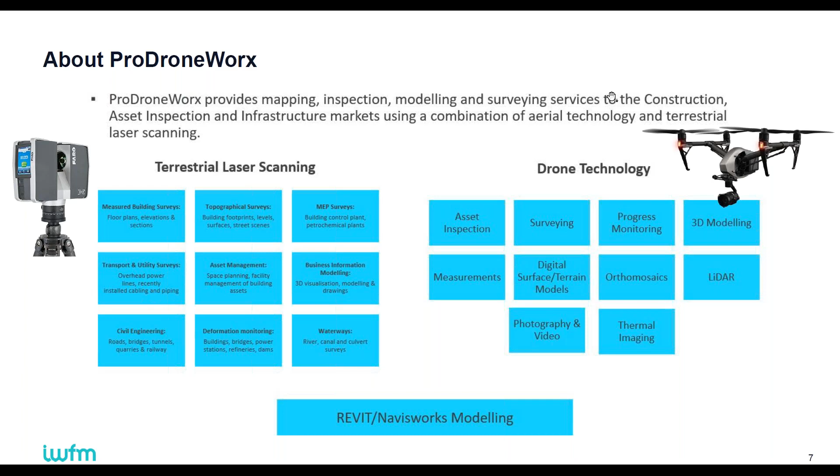So if you're looking at a particular piece of infrastructure, let's say a controller on a heating panel, you want to find out when was that last serviced, what's the model number of it, what's the operations manual. A lot of that information we can embed within the models that we create, thus saving clients a lot of time and money.

But yeah, these are some of the high-level benefits of using drone technology. I'll go through them quickly, touching on them as we go through the presentation. So the first one, cost savings. There's big cost savings when it comes to using drone services and solutions. They can be more economically beneficial than using traditional methods. It is cheaper to carry out a drone survey versus, say, a terrestrial laser scanning survey.

There's also big time saving elements. A drone survey can be done very, very quickly. For the vast majority of drone surveys, we can carry them out within a single day, whereas using traditional methods like terrestrial laser scanning, it could take a week, two weeks, etc.

A good example is we worked on a big project - a 20-acre site for a client, with a number of different buildings with different types of equipment on site. We carried out a terrestrial laser scanning survey of that site in 15 days, whereas we carried out the same survey using drone technology within a day. So there's massive time savings there. Again, there's pros and cons to using both, and we'll touch on that as we go through this.

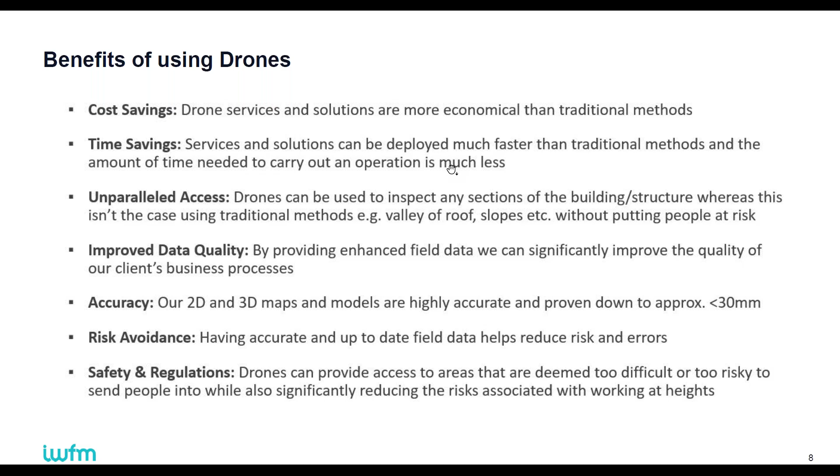This is an example of one of the digital outputs we produced, called a 2D Orthomosaic. For those unfamiliar with the term, essentially this example is from a project we flew in central Cardiff.

We had very limited access to the roof facility or roof area, and were only able to access this central verge here.

From that area, we were able to fly the drone and capture high resolution images of the roof area. An Orthomosaic is created from the hundreds and thousands of individual images we collect on the survey.

Those images are stitched together using photogrammetry software to create a 2D orthomosaic.

A 2D orthomosaic is ortho-rectified and georeferenced, which means it can be used in any AutoCAD, GIS, or BIM type system, and you can take measurements from it.

So if we wanted to take a measurement of the overall width or height of something, or calculate areas, lines, etc., all of that can be done from these 2D orthomosaics.

Because they're ortho-rectified and georeferenced, they're also a great way to do comparisons over time.

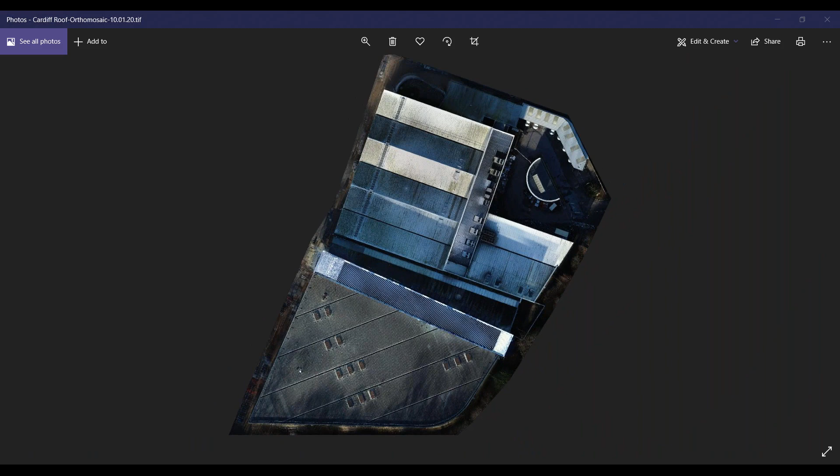You can also see here this slide - this is the DWG file from the roof survey we did, so you can see the DWG or CAD file overlaid on top of the Orthomosaic.

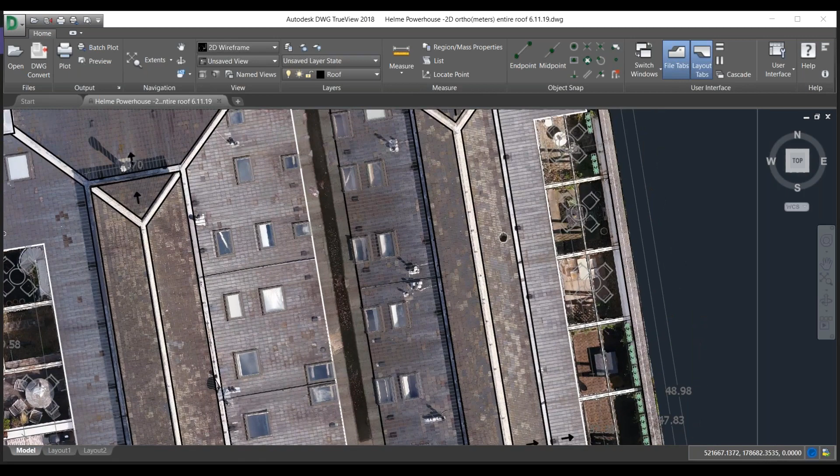You can see all the line work that's taken place, and it gives you all the different values.

So this can be used for planning and design work by an architect, and it could also be used for a planning application as well. It's very useful.

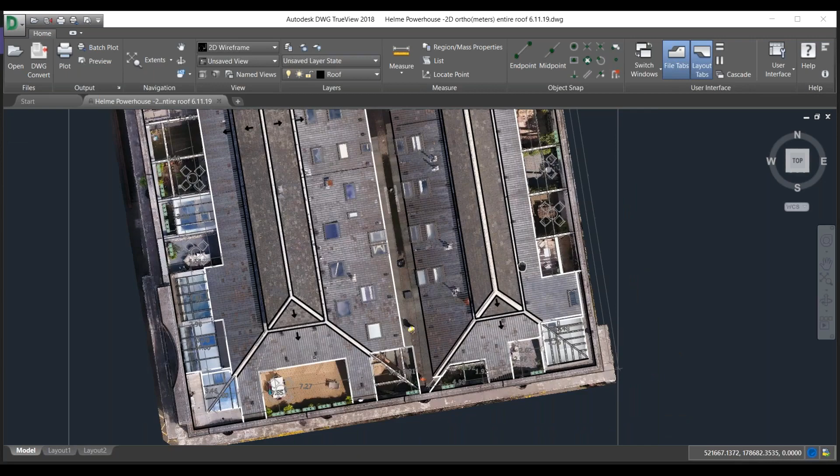So we go to the next slide. What we can also do is produce Google KMZ files. Essentially, we take the 2D orthomosaics we've created and produce a Google-friendly format, which gives us context on a facility. This is a big project where we surveyed something like 800,000 square feet of roof across 3 different roof elements, and the client was using the information for a conditional survey of the asset itself.

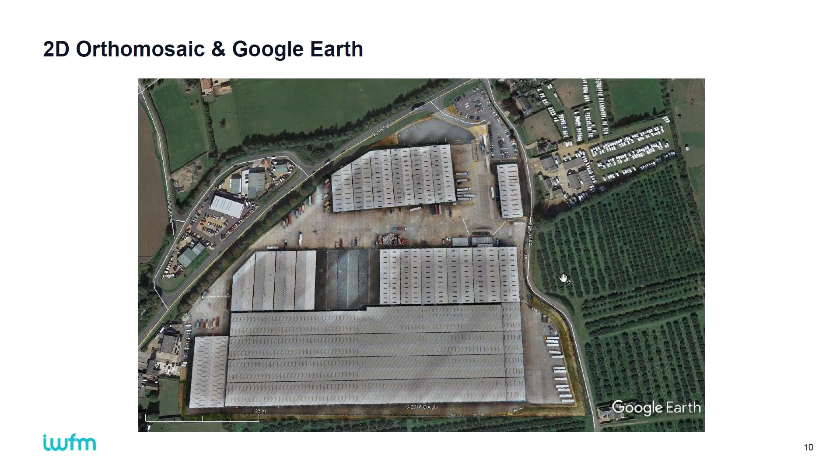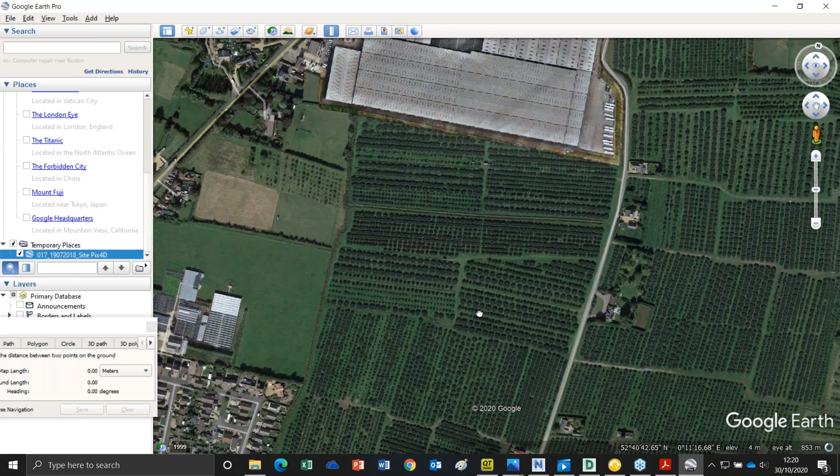I'll show you what the actual Google KMZ file looks like. So this is it. You can see here I can turn on and off layers. This is the Google Earth image, and as we all know, when you scroll in on Google Earth it loses resolution. When I turn on our image, you can see the level of detail. I can keep scrolling in. Just give it a minute to update.

You can see the difference between the two maps - there's quite a contrast between them. What our client was using this for, not the Google KMZ but the other file, is they were even able to see some of the rebar coming up through the concrete, which they probably wouldn't have noticed as much when looking around the actual facility itself. This can be shared with your on-site and off-site teams, and used as part of conditional monitoring and maintenance checks. You can start to see progress of changes over time.

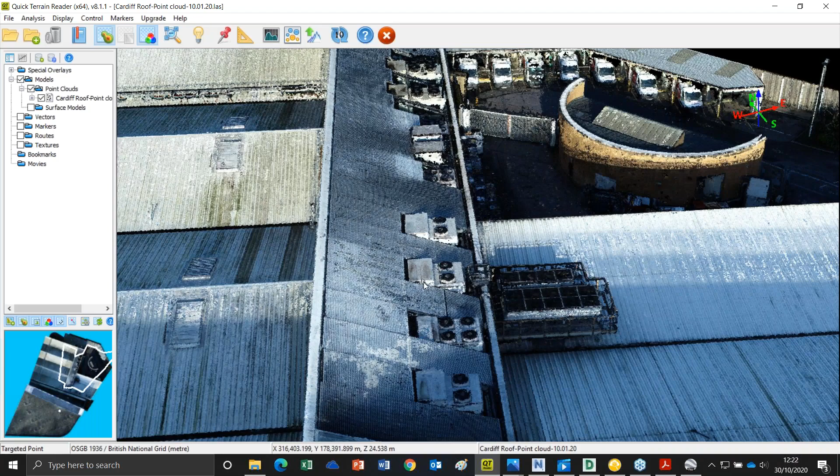What we can also produce is point clouds. A lot of people aren't familiar with drones - they think drones can only be used for photographs and images in a marketing environment, but they can also create 3D point cloud information. This here is an example of what that point cloud information looks like. This is a survey we carried out for a client where access to the roof and facade areas was very limited - traditional methods wouldn't have been able to access all parts of this roof area.

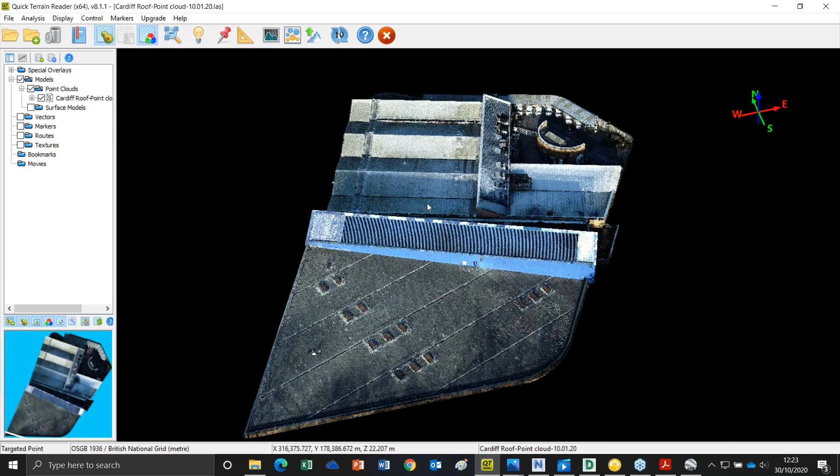The client wanted to use this drone technology to survey the whole roof area and produce a Revit model. Essentially, they wanted to use a Revit model for planning and design purposes to install solar panels on the roof. If you imagine planning how many solar panels you can fit, what size, how many can go onto the roof area, etc. - that's very hard to do without measurement information. Using a drone, we can provide that information to our clients, and then take this information and produce a CAD or Revit model.

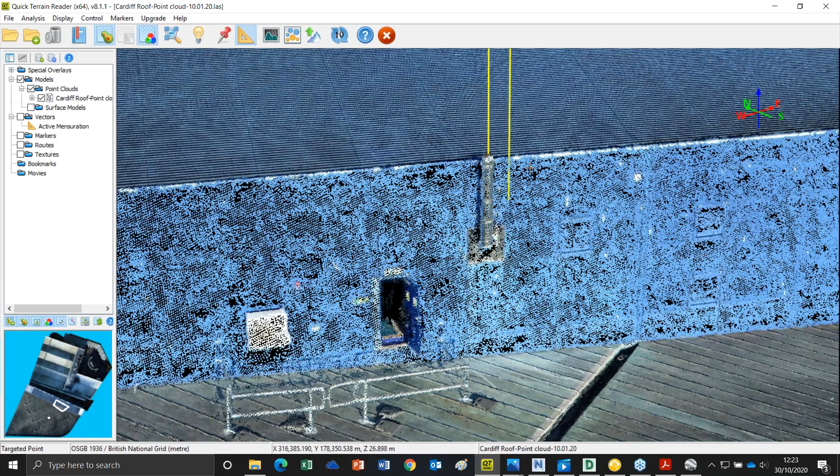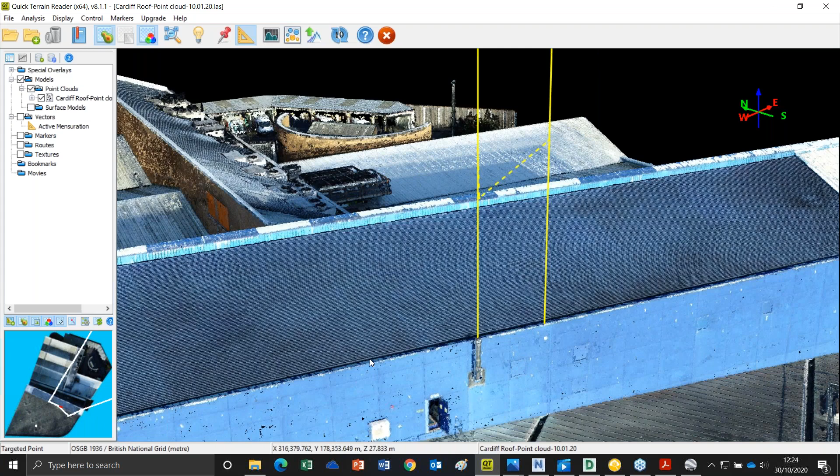I'll just show you here. Essentially it's a 3D point cloud, and eventually we get down to the individual points. We can scroll around any single part of this site and take measurements. If we wanted to measure the top and the bottom of this, we can do that. If we want to measure the width, that can be done too. You can see it up here - it gives us the measurement, 7.2 meters in total, and it also gives us XYZ coordinates, which are all tied into the OS grid.

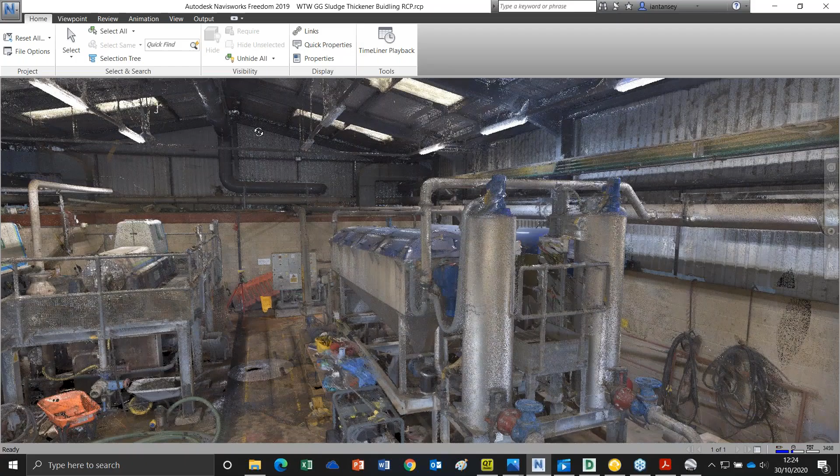We can scroll around any part of this project and zoom in. We can see the actual air conditioning units, measure those, and also take this information and produce a Revit model, which looks like this.

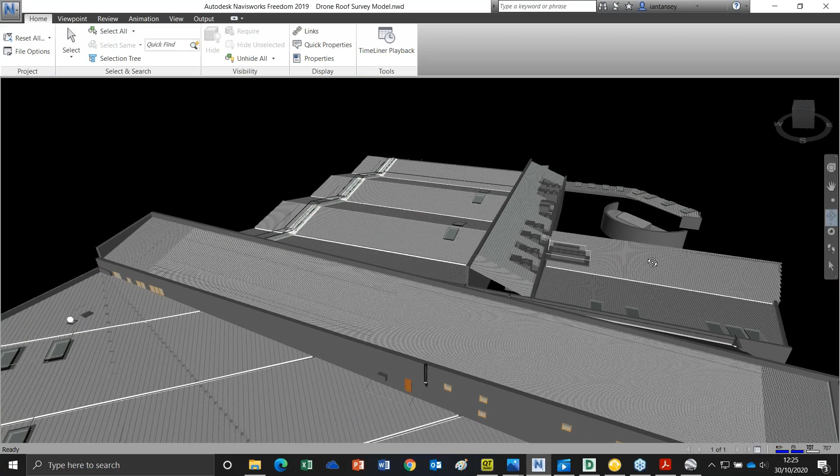This Revit model was created to, I think, LOD 300 with a mix of 200. What we can do is look around the whole facility - it's all coordinated into the OS grid. This allows the client to plan and see how many solar panels they can install on this roof area, so eventually it's all correct. You can also embed asset information within this as well.

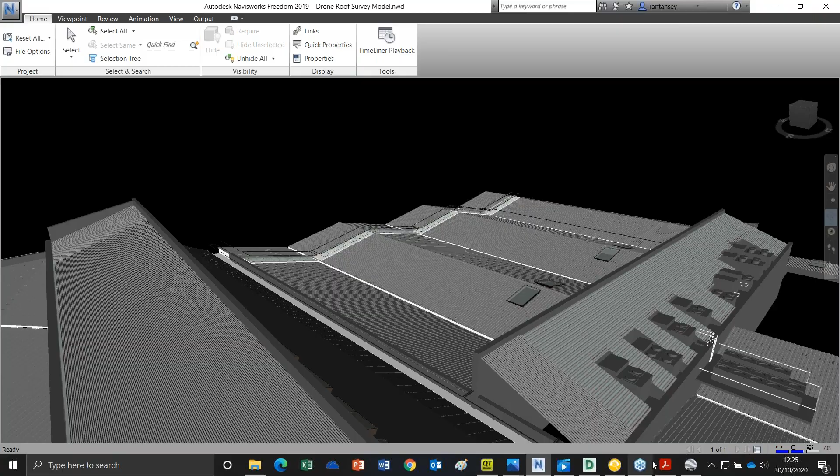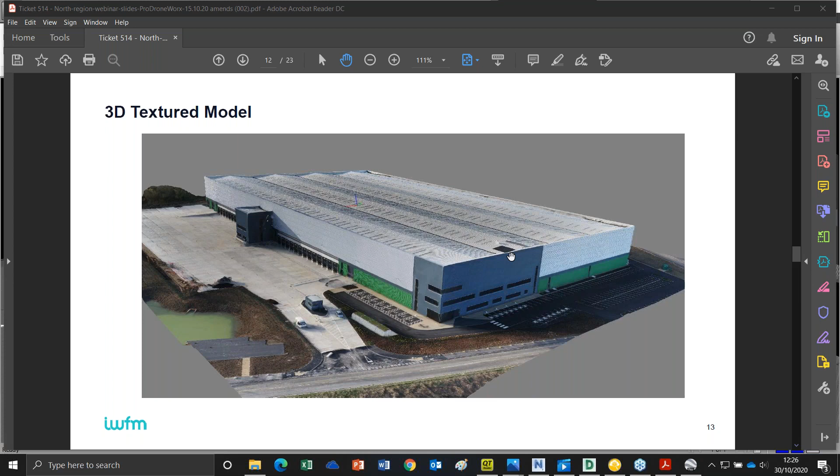Keep going. This is the Revit model we just showed. We can also produce 3D textured models, all in 3D, which can be used for collaboration on projects. You can scroll around, zoom in and out on any element of it.

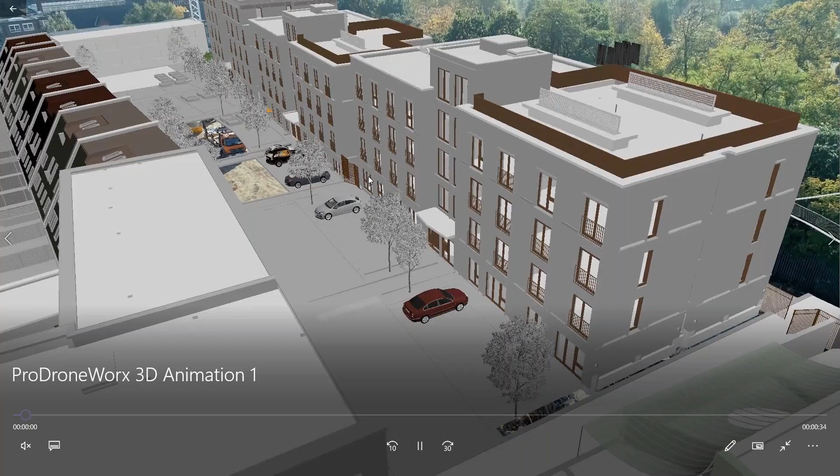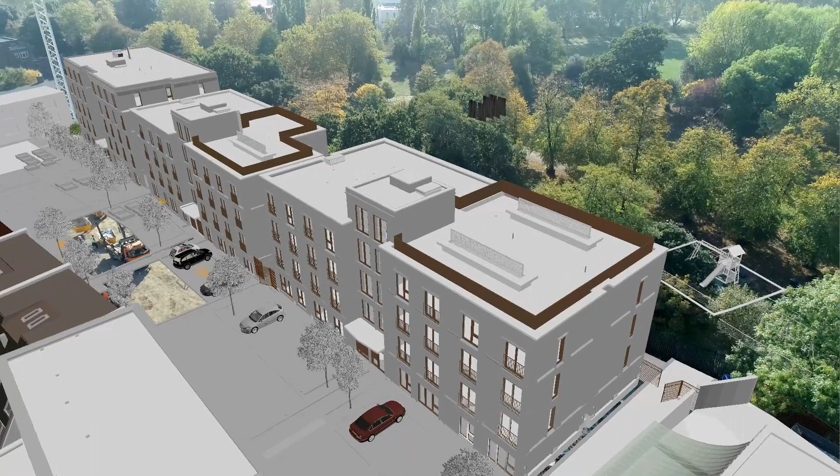It gives context and texture to a project. We can also do aerial 3D animation and augmented reality on videos. I'll show you what that actually looks like. This is an example where we'd have flown this project using a drone, and taken the drawings from the client to create these 3D models. What we can do then is render the 3D models into the video itself.

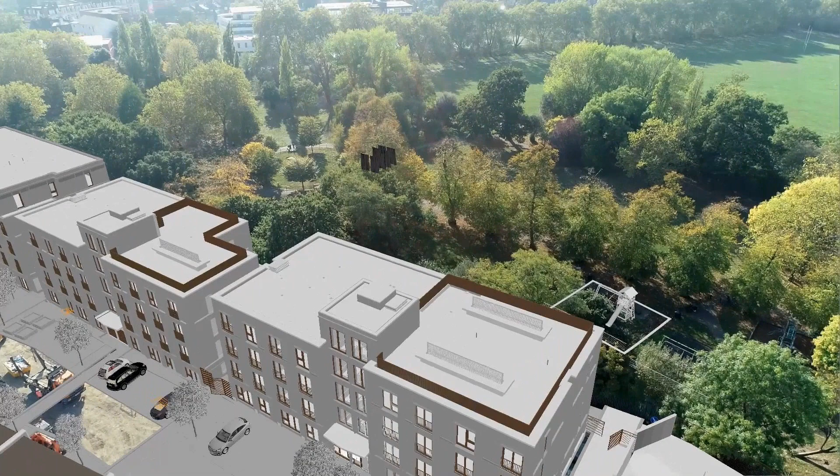So it gives you an understanding of what a project will look like. This could be great from a planning perspective, if you're going for a planning application for an extension on a roof or building. It could be used for this, giving planners a great idea of what the actual facility would look like.

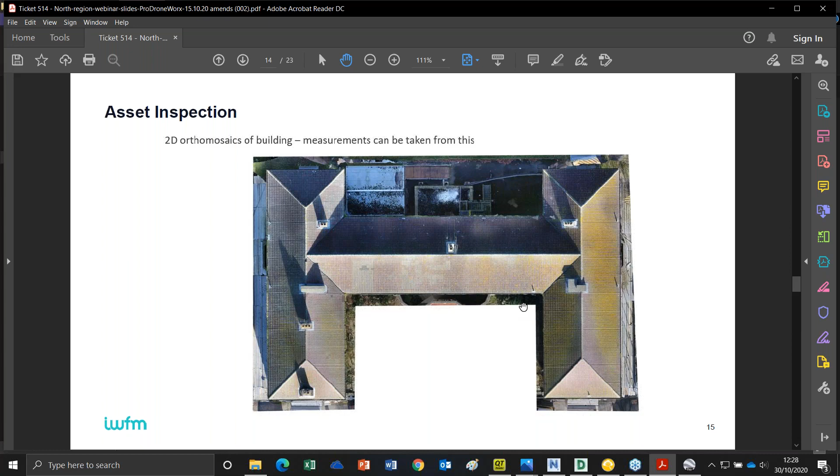This is an example of an Orthomosaic and what it actually looks like, very similar to the one shown previously. You can take measurements, see in one single image what the facility looks like, and start to do comparisons over time, because each image we capture is geotagged. So if you want to look at one particular area, you can relate back to the same area from a previous time period. And these are examples of what the actual high resolution images look like.

I'll show you an example - this was a project we surveyed in central London. We can fly pretty much anywhere within the UK. ProDroneWorx has a special OSC license from the CAA where we can fly within 10 to 20 meters of buildings, vehicles, projects, and people that are outside of our control.

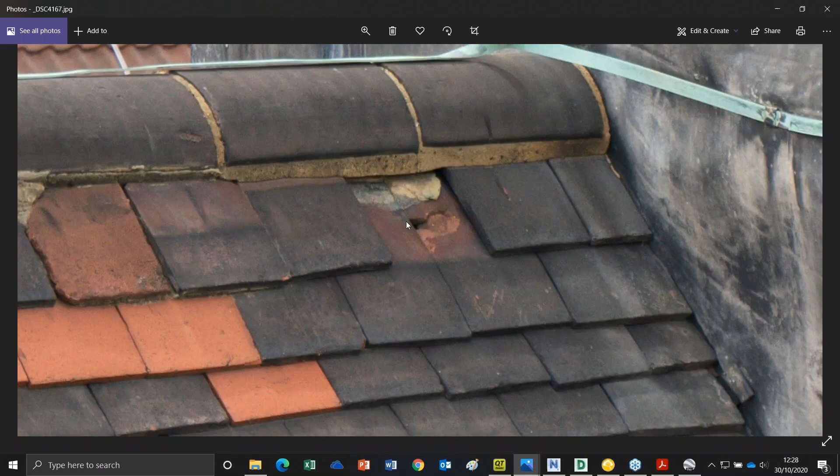This is an image from one of the cameras we use, so you can see the level of detail that can be captured. As you can see here, there's a missing slate tile, and defects right across the area. This information is really as good as being there in person. You can see a huge amount of cracks and broken steel work right across this facility.

You can see again here, lots of defects. A lot of these wouldn't have been picked up had you not been using the drone, or it would have been very expensive to use a cherry picker to access all elements of this. If you're in a central location like Birmingham, Manchester, or Liverpool, you're going to have to get a permit from the council to set up a cherry picker on a road, whereas you don't need such permits when using drone technology.

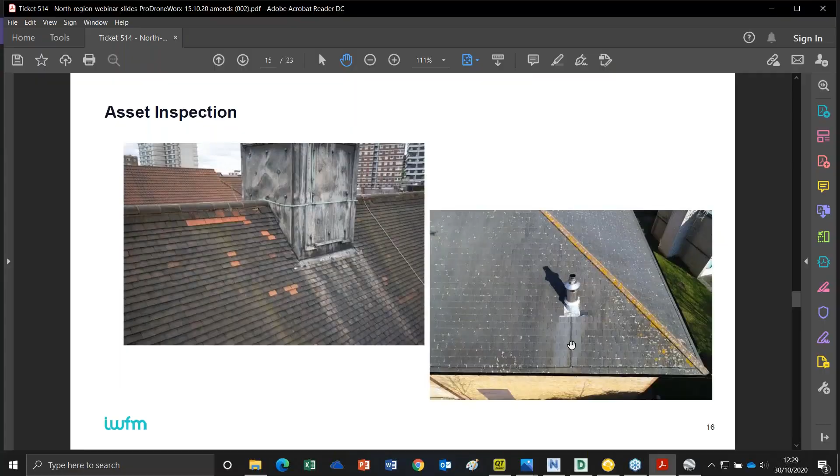What we're starting to do as well is push our clients towards using cloud-based platforms for sharing, posting, collaborating, and analyzing the information. When we do an asset survey, we can capture a couple hundred or a thousand images - how do you actually go through those individual images, and where were they actually taken? If you have a big roof area or facade that looks quite similar between one area and another, how do you know where the image was taken? A cloud-based platform allows you to do that, and this is a good video which shows that process.

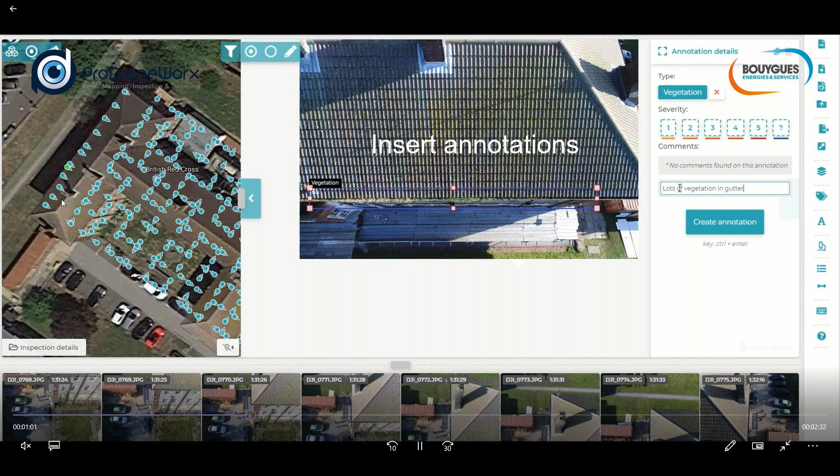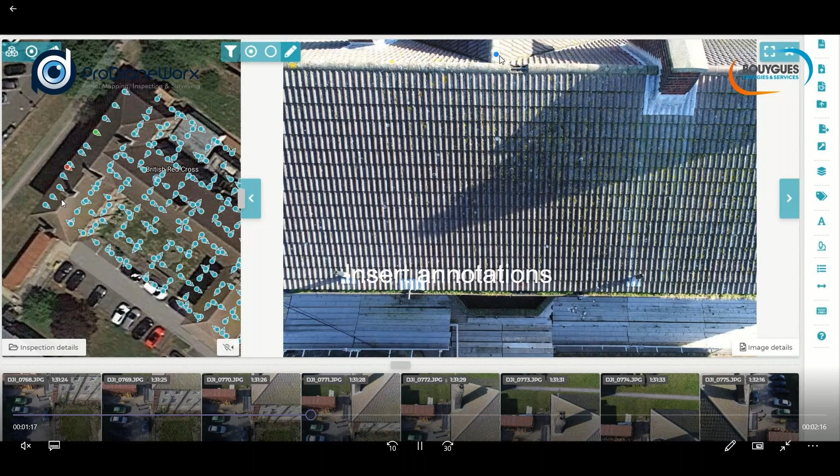You'll see on the left-hand side that dot goes from green to red. That signifies that there's some type of defect. You can see in this example here we have some ridge cap missing. So we can highlight the area and write that into our annotation or notes.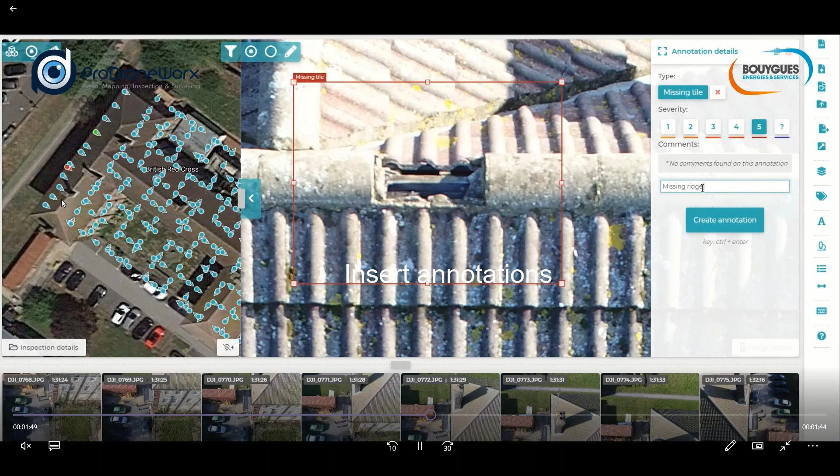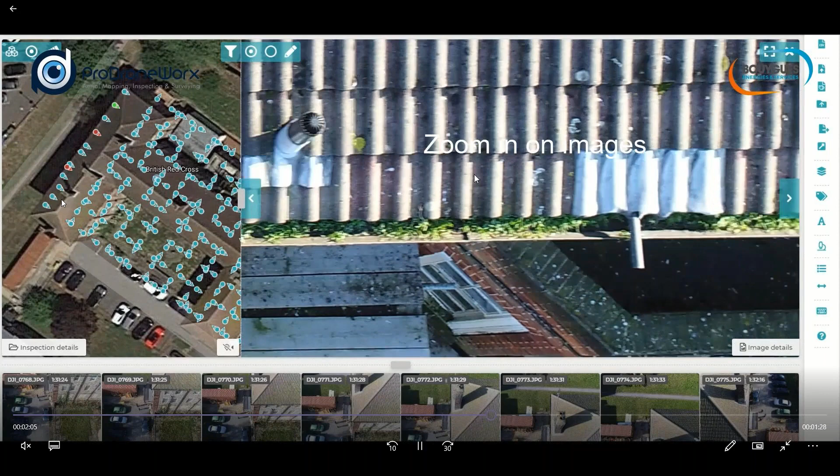The real benefit is that you can have different people within the organization having access to this information. With a lot of people now working remotely, you could have different levels of access. So you could have a team based in Manchester, Liverpool, London, Bath, Bristol, etc. collaborate on this project, everybody having access to the information, and the information then being shared with subcontractors.

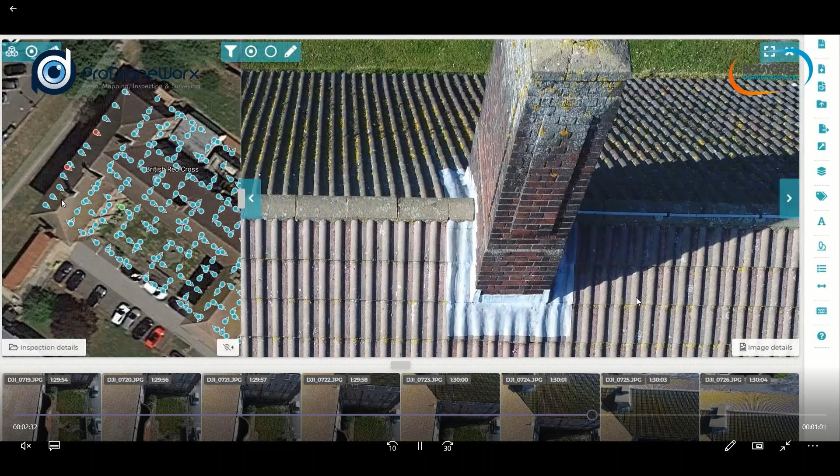So once you've gone through all the individual images, you can produce a PDF or an Excel document which has all of the defects highlighted on it. And those defects can then be shared with subcontractors.

So if you have a surveyor who's gone through all the information and highlighted all the issues, you can then share this information with subcontractors. They can price the work accordingly, and you know exactly what work needs to be done.

And then, maybe after the work has been carried out, you could do a second flight where you fly the same facility and ensure that all the work is carried out as it should be before you hand over any money to the subcontractor. So it's a great way to validate quality control checks on a project.

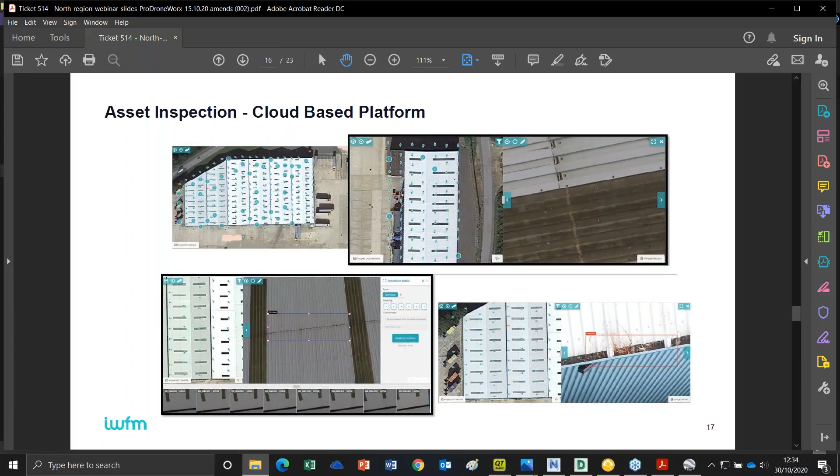And then you'll see here it gives us the ability to generate a PDF report, and I'll show you what that PDF actually looks like. So this is an example of that PDF report.

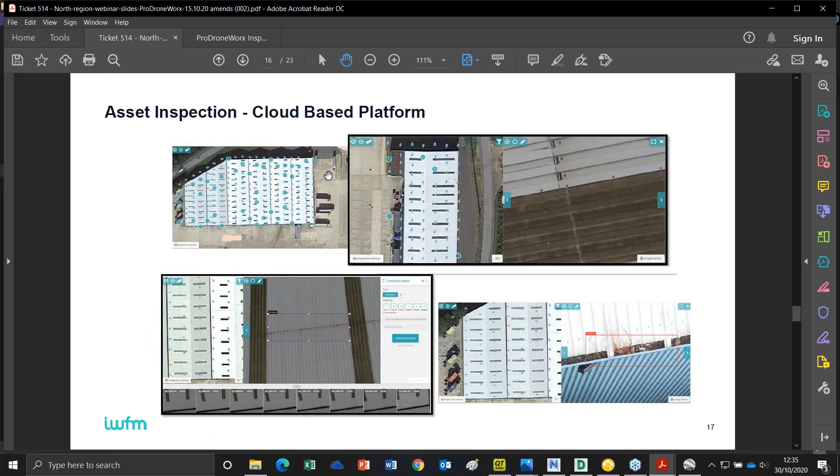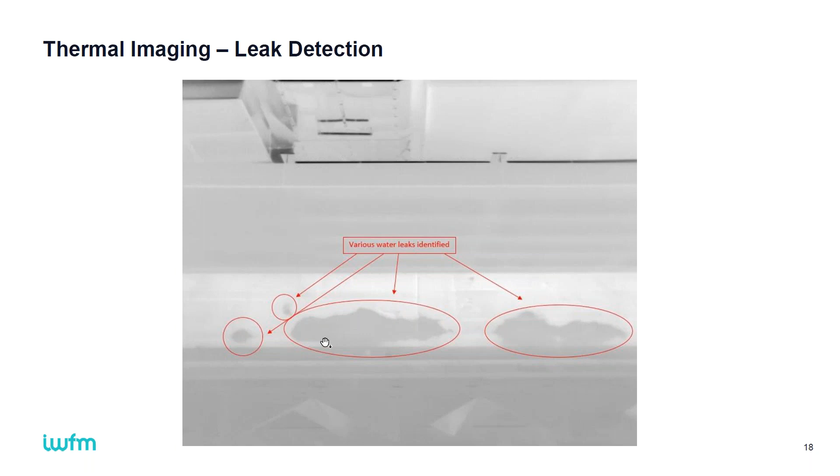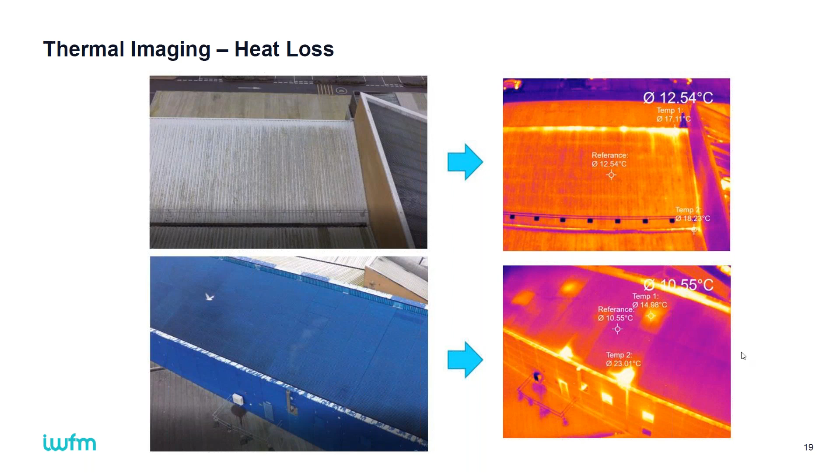Solar panels is another area where thermal imaging can be used. A lot of facilities now are using solar panels on roof areas, and how do you actually check that those solar panels are operating efficiently and as they should be? Access is not an issue with a drone survey. We have a special thermal imaging camera that we attach to the drone, and that camera will carry out an assessment of these solar panels and identify panels where there's defects.

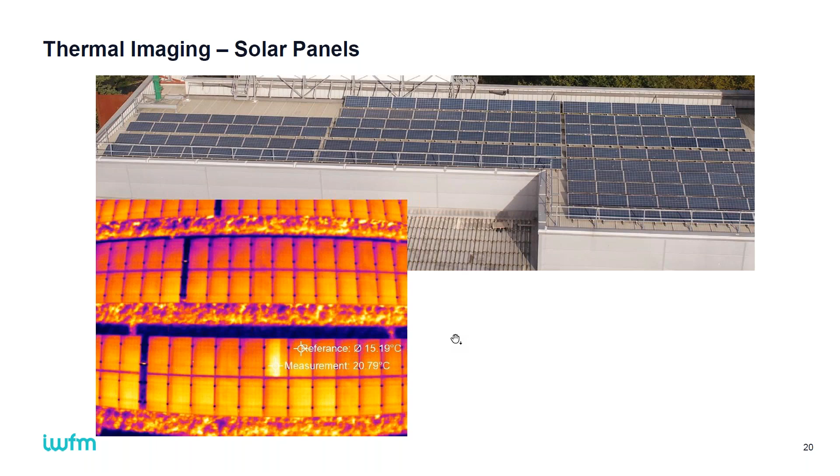So we can see here there's clearly one solar panel on this roof that's defective. It's very, very hot at just over 20 degrees where it should be a constant 15 degrees. We've had instances where a client installed 50 new solar panels straight out the box, and some of those were defective. On one project, a client had 50 solar panels installed and asked us to carry out an assessment. We identified 3 of those solar panels were defective, and they were able to claim back under warranty from the manufacturer using our reports. These surveys can be carried out regularly to make sure the solar panels are operating properly, because if not, you're losing money.

This is a great example of where we've used terrestrial laser scanning on the internals and externals of a project.

Before we go into laser scanning, there's a couple of interesting and relevant questions to what you covered. We saw quite a few places where not only commercial, but also domestic properties are being shown. Is there any concern about privacy when pictures are taken, in case something else is captured?

Yeah, it's a question that comes up quite often, people concerned about data privacy. But data privacy only really affects companies and individuals when there's actually a link between the actual images taken and information itself. So, let's say for example we're in central London taking photographs. I'll go back to one of the previous slides.

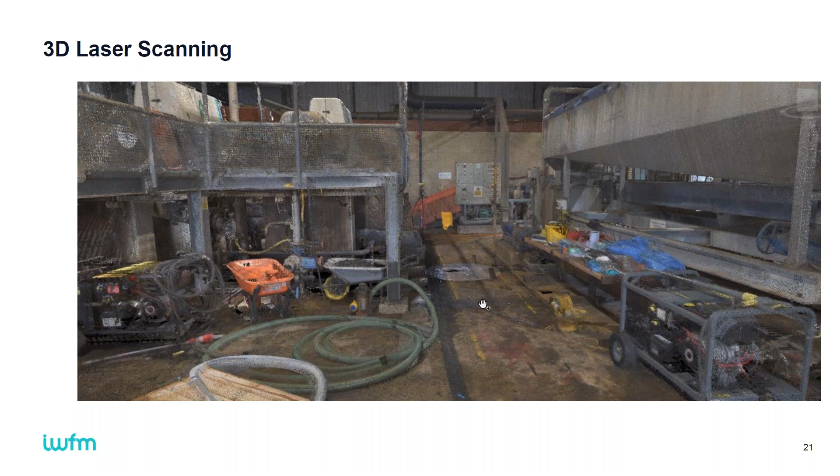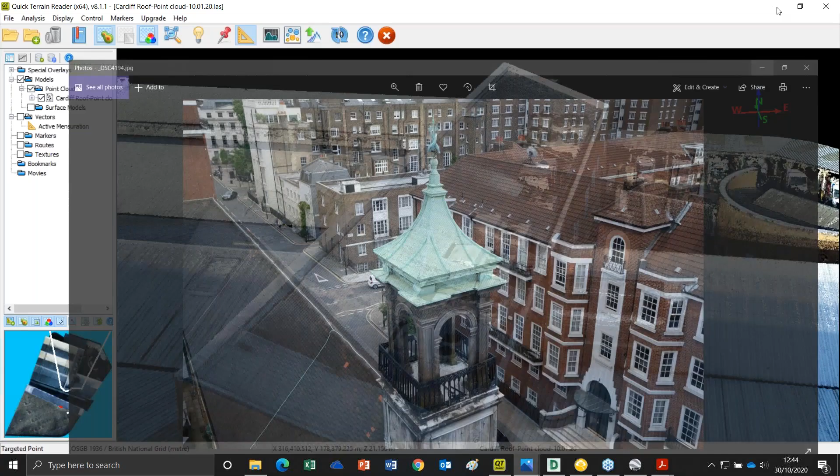So I'll just show you an example now of a terrestrial laser scanner. There are instances where it's not practical or appropriate to use a drone service. So if you want to do an internal survey of a facility for MEP or facility management purposes, you wouldn't really use a drone to do that, although you could. So we would use a terrestrial laser scanner instead.

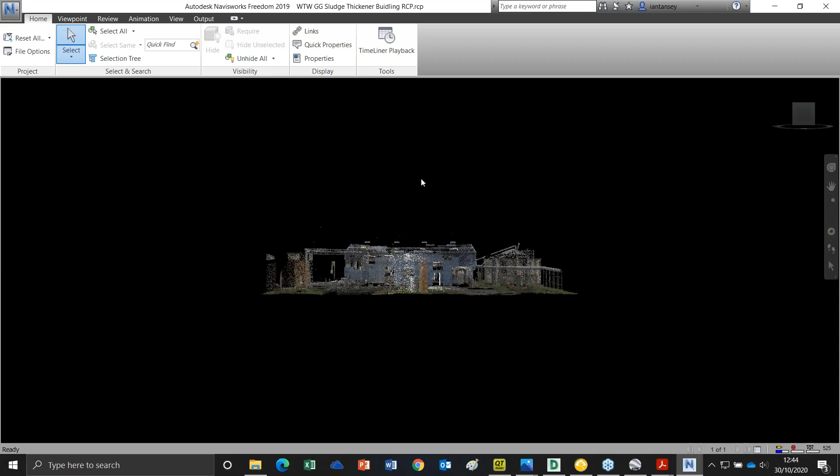And this is an example here of what that looks like. This is a sludge building on a water treatment works. You can see here we have a huge amount of information both inside and outside of this facility.

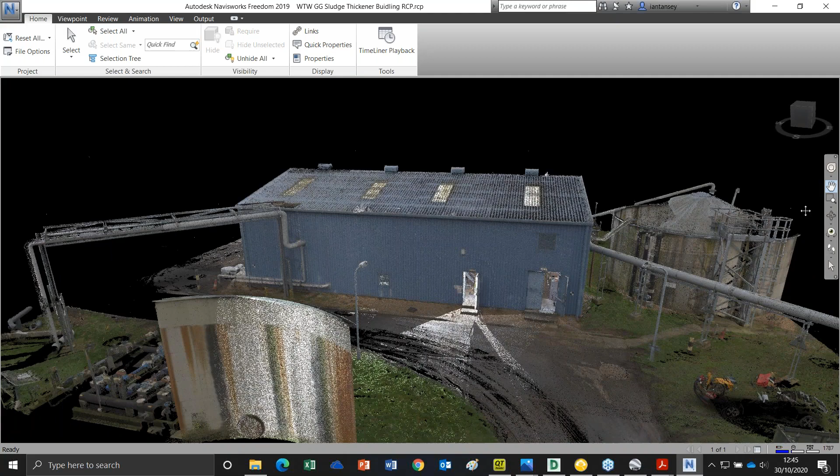A lot of clients are actually using this to understand projects and assets. So rather than having colleagues visiting site repetitively to take measurements or even just to look around and understand the condition of a building, we can go in and capture all this digital information at once. That information can then be used by various different departments to understand or navigate around a building without having to visit site. So there's huge time and cost savings when it comes to that.

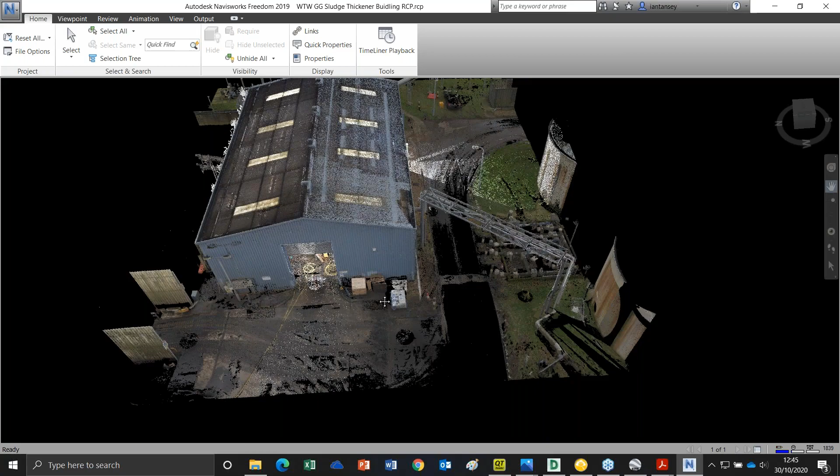You can see here we can very clearly see all around this facility. We can go inside as well, so our laser scanners were inside this building capturing information in high detail.

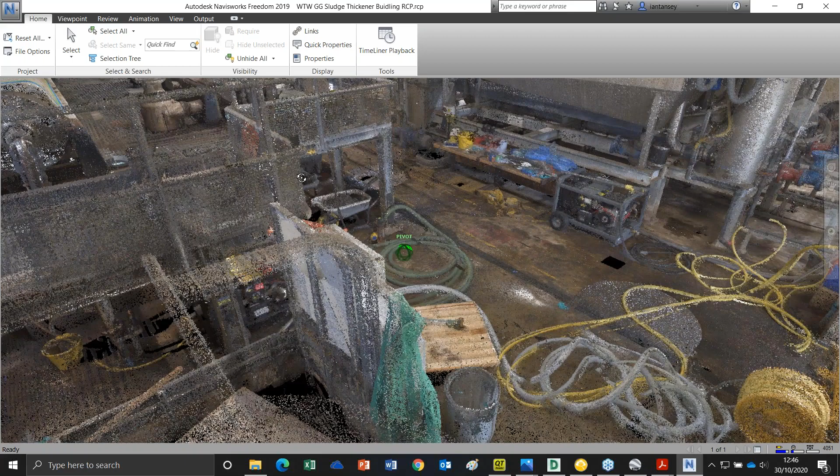We can scroll across any part of this site or building and get a huge amount of information. Again, we can take measurements from it, but even if it's just to walk around the facility and understand what pipes are there, etc., we can do that.

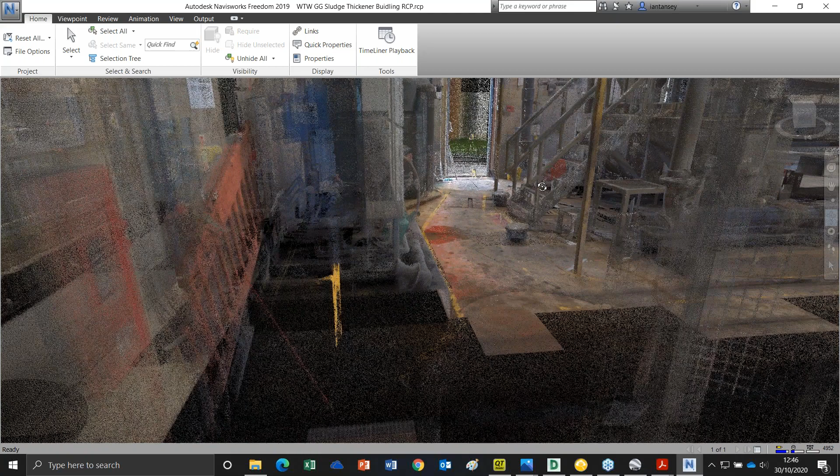And then we can take this information and convert it into a Revit model. I'll just show you a video of what that actually looks like.

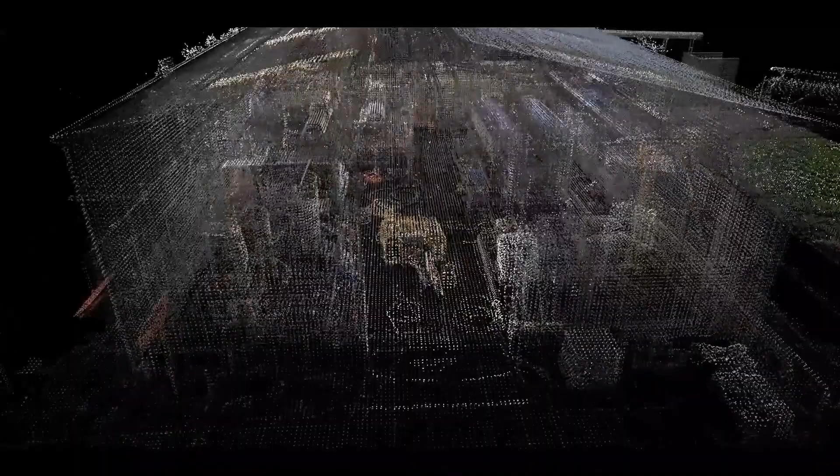This is an example of a video where we've taken a point cloud using our terrestrial laser scanners and converted it into a Revit model. As I mentioned, we can do it from LOD 100 down to 400, and then we can embed asset information within it. So this could be great from a facilities management point of view.

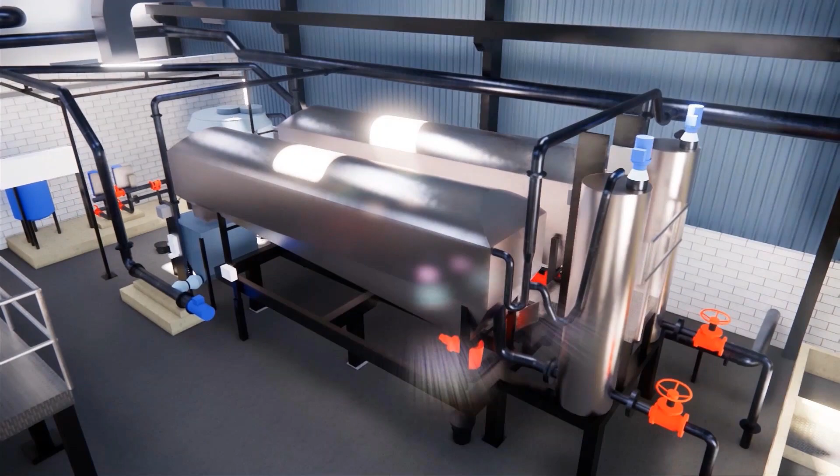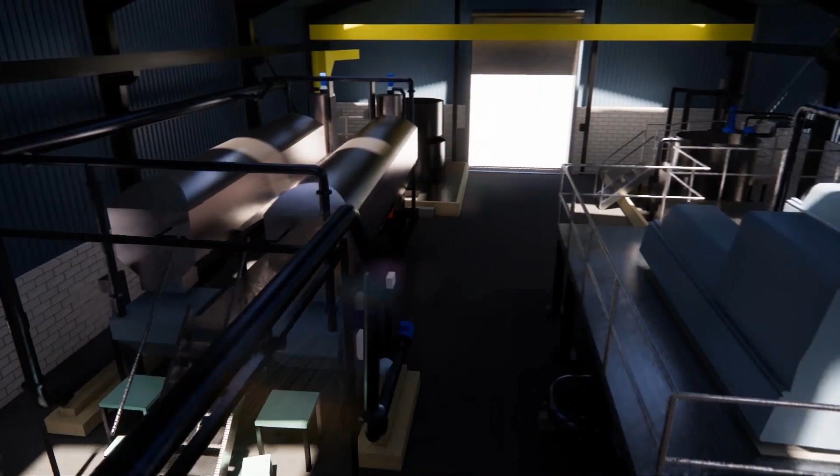So if we have different features or elements in this project, we want to embed asset information to see when it was last serviced, what model number it is, when it needs to be replaced, the operations manual, etc. All of that information can be put and embedded within these models themselves.

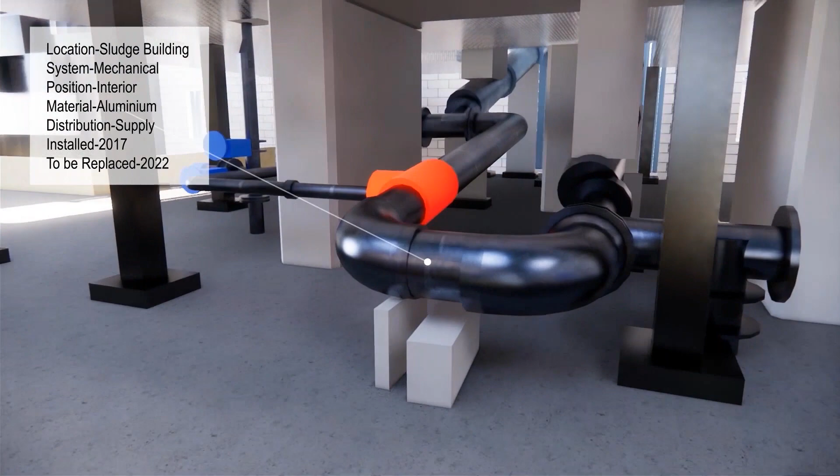So you can see there it's quite realistic, and it can be used by different departments for different reasons.

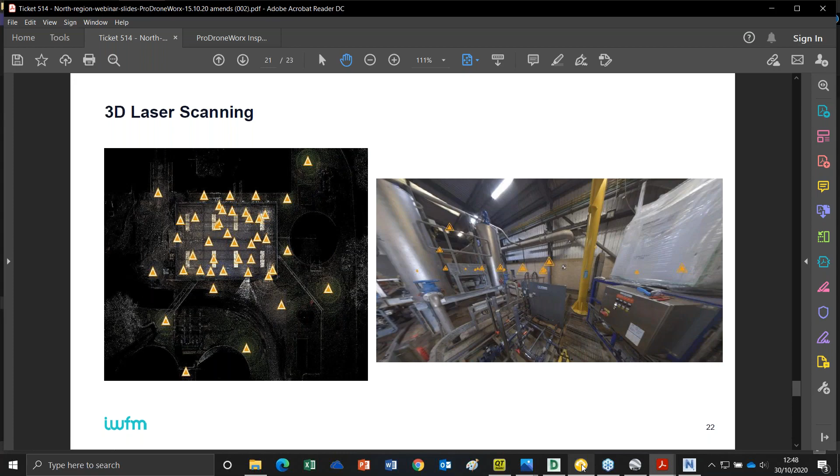And then we also have not just the point cloud information, but we can also look at 3D images. So this here is an overview of that actual building itself, and each one of these triangles represents an individual area where the scanning took place. What we can do is double click on it, and then view and scroll around the facility, which gives us a great idea of what's in the building. We can skip or jump to another one of those arrows, and it gives us a perspective from a different angle.

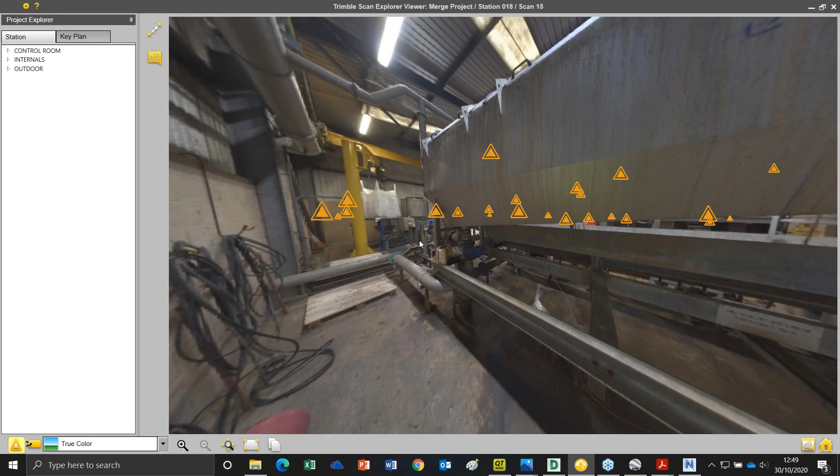As I mentioned, a lot of companies are using us to survey a site so they don't have to have their colleagues going back to site again and again. They can jump around the facility, see what's there, and take measurements from it, which gives them a great understanding. We can also scroll in on some of the images, which gives us a great understanding of the condition as well. This is one of the standard outputs that we produce.

So we have a few questions. A follow-up to the pest question - is there also any possibility to use drones to eradicate problems, or at least divert them in case of birds or something like that?

Would you come across that? Not really. We've had one or two inquiries from clients about using drones to wash windows - so you have an arm on the drone which washes windows at high levels. Again, it's something I've seen being developed, but I don't think it's quite there yet. I'm sure there probably will be features on drones in the future that'll eliminate or allow ways to eradicate vermin and pests, but not as of yet, like blocking up holes, etc.

So what accuracy can be gained for pipework and equipment? I think maybe I should explain the different levels of detail we can get in BIM and when we do scanning. So like in this example, this is a drone survey point cloud - the relative accuracies are around 2 to 3 centimeters. So if I want to measure the width of this air conditioning unit, I know it's going to be accurate to probably within 2 or 3 centimeters.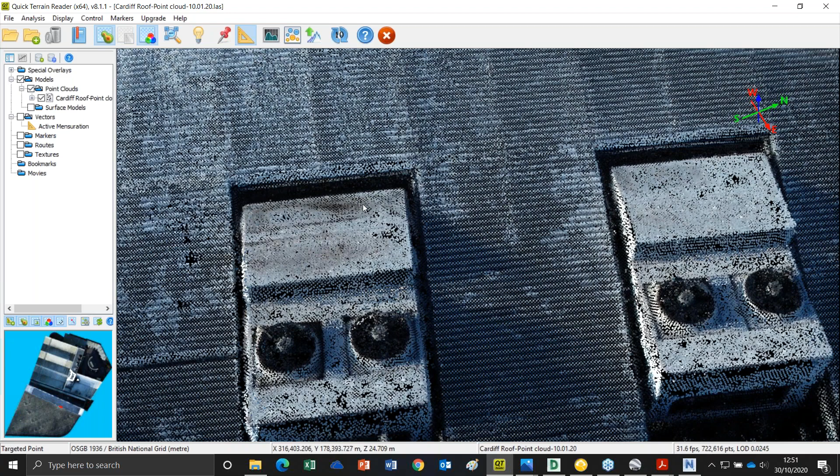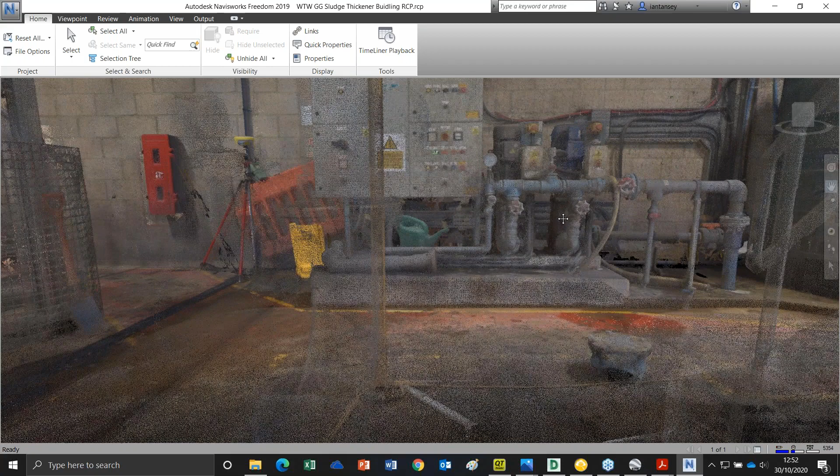Now if we were to switch to terrestrial laser scanning, which is this here, the accuracy will be sub 10 millimeters, so sub 1 centimeter. So there's a bit of a difference when it comes to the accuracies, but again, it's all about why the client wants it, what are the reasons for it. Different technologies can be used in different ways for different levels of accuracy, and that helps.

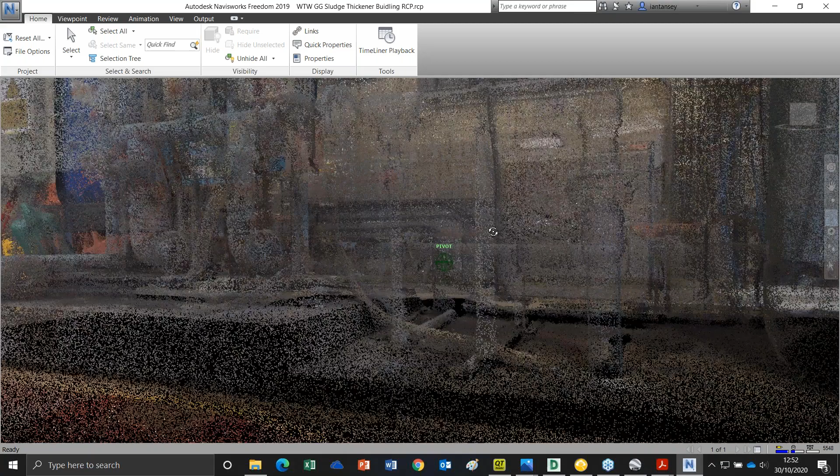Thank you. And once the scan has been done, what ways do we have to share what we've captured with clients, and is it easy to prepare those - if it's a fly-through or a 3D model or something the client can use as an end product?

Yeah, again it kind of depends on what software the client has. The easiest way to share it is through the cloud. Like what I showed you with the roof inspection for the NHS hospital, that information can be shared in the cloud with the client, so you can give the client access to it through a web browser. That could be done with a drone survey, or with a terrestrial laser scanning survey as well, like what you can see here. So what we're starting to do is push our clients towards using cloud-based platforms for hosting, storing, sharing all that information.

And a few of our clients have raised concerns about where the information is stored and hosted - they don't want it being hosted in the US. So we use UK-based servers to host all of that information. It's all kept here, and then the client gets easy access to it. Essentially you'd share the web link, and give them a username and password. They'll be able to access the information - they don't need special types of PCs or hardware, which can be expensive.

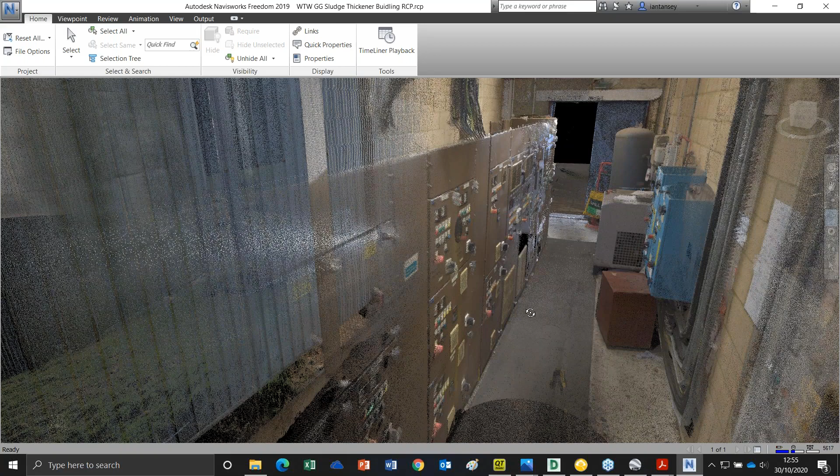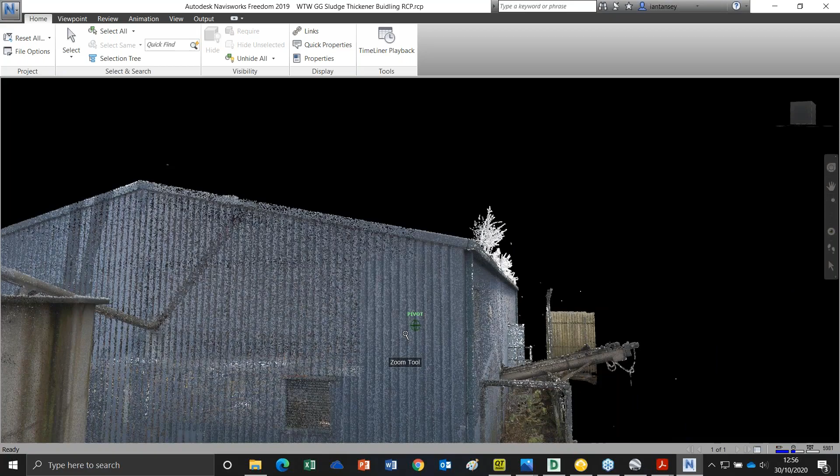If you want to do laser scanning of the internals of the building, again it's very hard to say - how big is the building, how many floors, etc. But just to give you an example, like this survey we did here - say a plant room, for example - we surveyed this facility within a day, and to produce all the outputs, roughly, depending on where it is, we're talking 2,000 to 3,000 for all this information.

They're kind of just ballpark figures. It's not hugely expensive in the scheme of things.

And then if you want to do Revit modeling, that's additional cost on top. In order to price that, it depends on whether you want asset information embedded in it, and the level of LOD. But as an example, that could be £4,000 or £5,000.

Another question that ties up with this is, in terms of regulations, are there any special licenses or anything that needs to be obtained beforehand? How does this whole thing work? What do we need to do beforehand? Are there any additional costs to get any permissions?

When it comes to terrestrial laser scanning, there's no special permissions required. All you need is permission from the client to scan or survey the building, inside or outside.

When it comes to a drone survey, that's a bit different. We have a special license from the CAA, called the PfCO or an OSC, and that allows us to carry out operations essentially anywhere within the UK. We don't need permission from anybody to carry out those operations - again, just the client. So we just need permission from the client to fly around their facility or their assets.